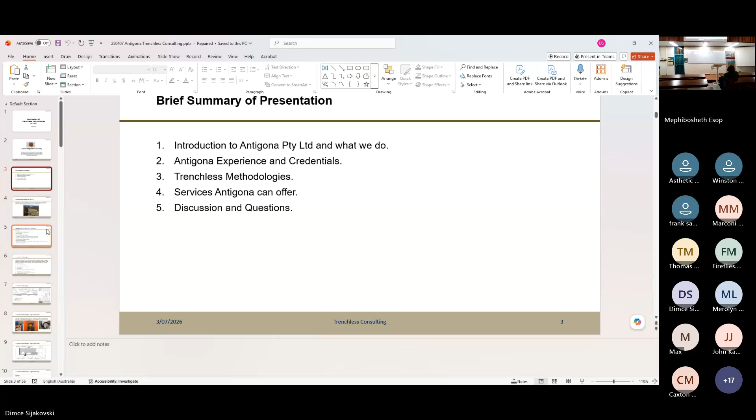So this little company was established back in 2004 and exclusively has worked assisting contractors, assisting authorities. It provides consulting, design during pipeline installation, communication installations, and as I said before, it has got application into a lot of infrastructure areas and the mining areas.

The company specializes in contracts and project management, site supervision. We can do analysis and evaluation of the potential. We can do estimation, cost analysis, methodology recommendation, setting objectives and implementation, and attaining implementation of long-term plans, business development, and as I said, our clients are contractors, consultants, state and federal, road, railway, water authorities and agencies.

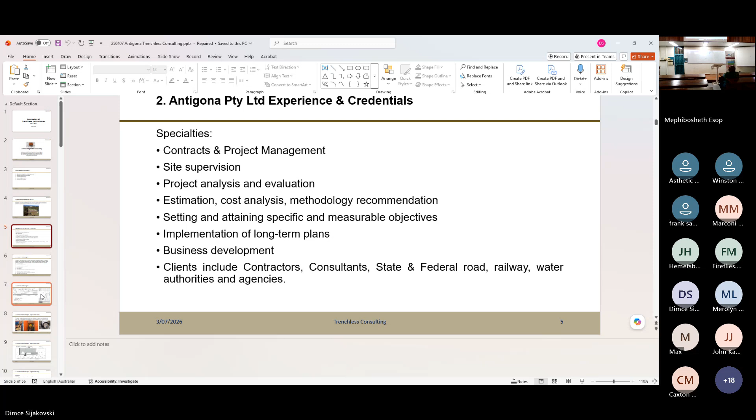Depending on who you talk to, there's no specific standard, but these are the types of methodologies that are most common in Australia and throughout the world. The simplest of all is auger or thrust boring. Then we have microtunneling / pipe jacking. We have horizontal directional drilling.

Pipe rehabilitation is something that I think will be quite applicable for the streets of Port Moresby. Pipe ramming was an early methodology that is not that often applied lately.

I decided to put here an example of launch and retrieval steel segmental shafts, which can be used as the word implies, to launch the microtunneling machine and to retrieve it from the other end, and then it can serve as a shoring system while you're building the manhole. But there's plenty of photos down there. I believe photos replace 1,000 words, so it will be clear once you just go through it.

When I was driving on the Cocky 2-mile road last year, I noticed an example, and Murphy here is telling me that case is potentially being closed now. But I want to explain to you, I use that as an example of what can happen, and unless the service, the stormwater pipe is repaired—and it can be repaired by trenchless methodologies—because that specific case was quite complex for it to be repaired with standard excavation, cut and excavation methodologies.

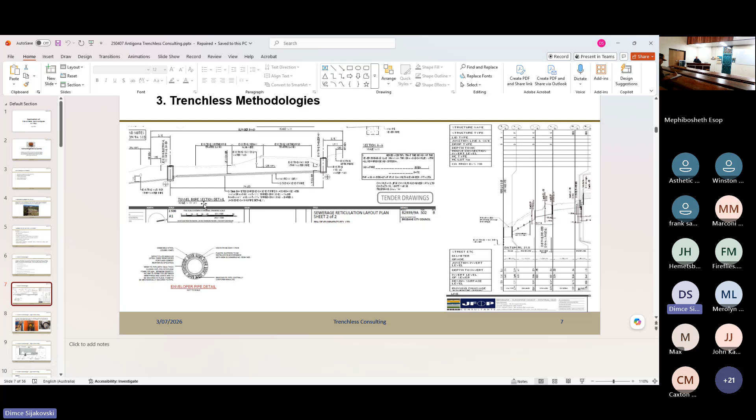And it's not just any geotechnical information that is needed. You need to do the geotechnical bore at least to the invert level of the pipe. You need to understand where the water level is. If there is a water level, you need to determine whether that's water level based on rainfall, or is it water level that's always there. You need to determine the abrasivity of the rock, the strength of the rock. There are standards and specifications which nominate what the geotech report needs to have.

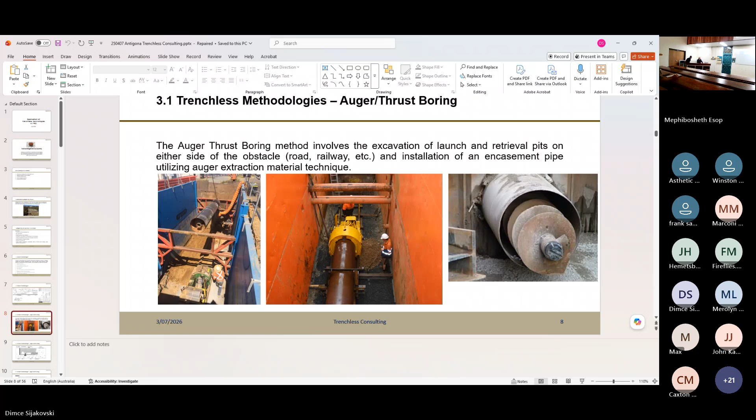This is your typical auger boring machine. So this is your typical auger boring setting up. This is your auger borer. These are the augers that go inside the casing, and the next slide basically explains it.

So you've got a cutting head here at the front, and the earth that's excavated at the drill face gets transferred back through the casing with augers that are tied to each other, and then it basically comes out of the auger machine. It's one of the simplest of methodologies.

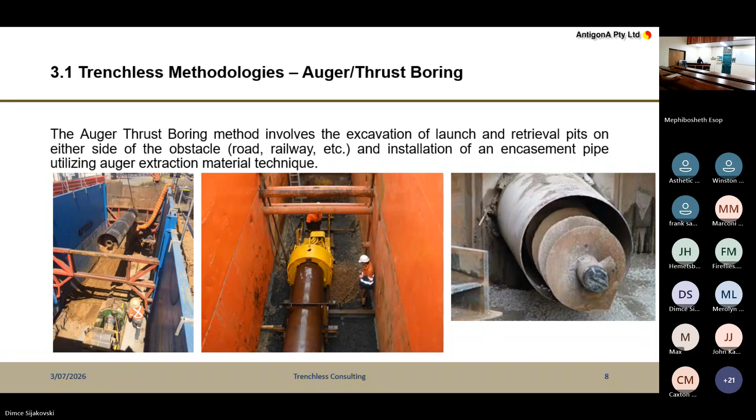You can't steer this method, so you rely on the experience of the operator, and usually it's applicable for water pipelines where the precision can be off by 200, 300 millimeters left or right, and it's only good up to, let's say, 50, 60 meters. Depending on the experience of the contractor, they can go more. But that's your typical auger boring method.

Each of these methodologies has got its own advantages and disadvantages. Like I said, auger boring is cheaper because the methodology used to extract material from the head of the bore is basically augers, and then it comes into the pit, you pick it up with an excavator, off it goes. The next methodology is, let's say, vacuum, and you need to have a vacuum truck on site all the time, but that will come in the next slide.

The disadvantage is that it's not as accurate. It can't go in very, very hard soil. It can only go to 20 MPa UCS, and as I said, the bore length is limited to about 60 meters. Whenever something goes beyond 60 meters, we try to price it as a guided bore, which will give you certainty where the bore will exit, come out.

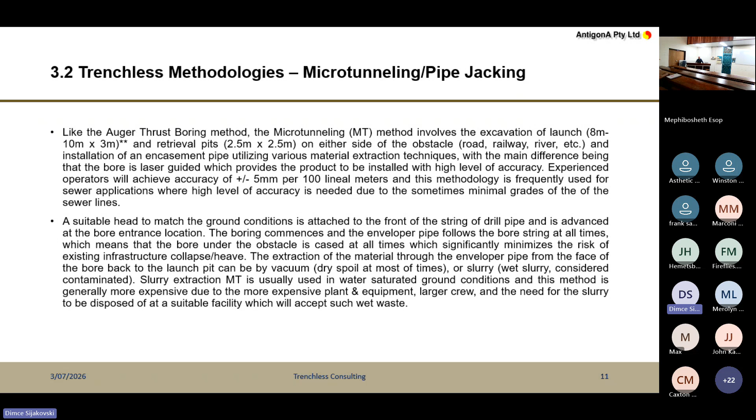This is very much utilized in Australia, in particular for deep sewers, where the difference between the starting and the end invert level is quite limited. So if you've got, I don't know, 100 mil over 1 kilometer for a 1 kilometer sewer to be installed, it's very crucial that you achieve that precision. This methodology can go up to 150, 200 meters using the humble pipeline laser.

There are more complex machines, which I'll show a little later, that can go a kilometer, 2, 3. On a mining project in Papua New Guinea, there was 4.2 kilometers of microtunnel done. But that is a complex machine that uses complex survey methodologies, and there's simply no time in this short session to explain it in detail.

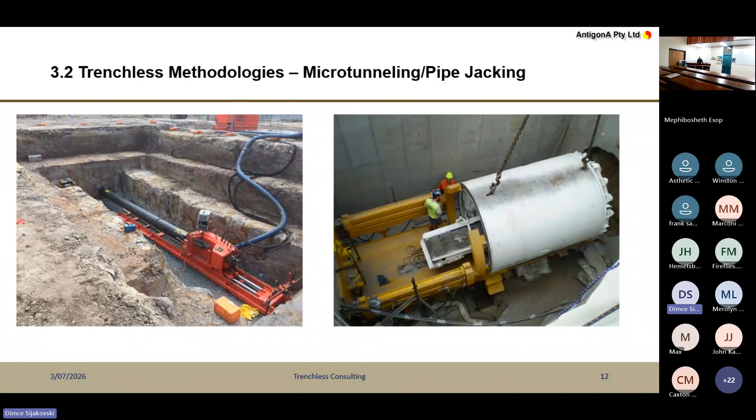So it's very specific. Every job is specific. You need somebody that knows about the technology to consult and advise for the best choice.

This is a project that was done for a company called Tunnel Boring Australia. They specialize in pipe jacking. I'm not sure if you can see this at the back - this is a thrust wall, part of the design of the works. In front, the white part is the shield, and behind it we have specific concrete jacking pipes coming through.

In this shield, as we call it, there's an operator sitting. If the ground is favorable, which is OTR or other than rock, he just digs it with a simple backhoe digger. The advantage of this methodology is he can see if there are any obstacles.

I don't want to tell you what we've come across. We've come across cars, reinforced concrete, manholes, everything, even some bodies, but that's okay - I'm joking.

This methodology we call open face pipe jacking. The operator can see what's going on. If there is a big boulder, for example, or something reinforced, we can cut it and pull it through the shield and through the tunnel that we have formed.

This is the more complex machine. It's a German machine, and Herrenknecht is one of the leading manufacturers, but they are very expensive. The trouble with them is they don't have an open face. So if you put this cutting head for mixed ground conditions and you come across hard rock, the only thing to do is dig it from the top, and that's the risk usually taken by the contractor.

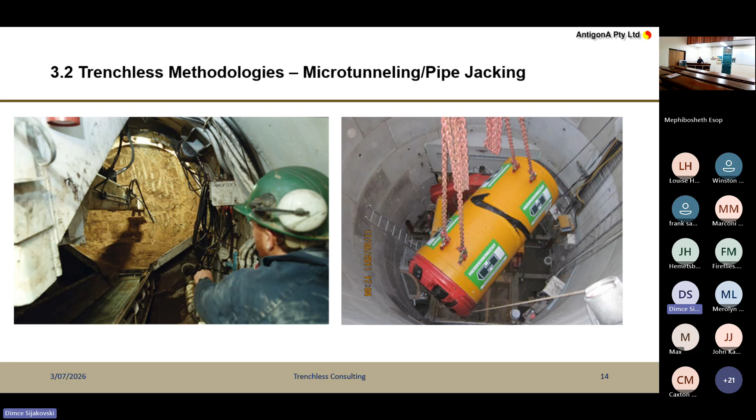But those machines are steerable. To do a 4.2 kilometer tunnel, like I explained before, you need a complex survey guidance system, but you also need intermediate jacking stations, because there's no way you can push 4.2 kilometers of pipe with all that pressure around it using just these jacking frames. So an intermediate jacking station is introduced every 100 to 200 meters, and then you push that part of the tunnel. These are very, very complex, and the mining and oil and gas industries can afford that - here you wouldn't have application for it.

In this city there are possibilities to put sewers and storm water very deep, but a feasibility study needs to be done so you can determine - or again, NCDC or Water PNG can decide whether it's needed.

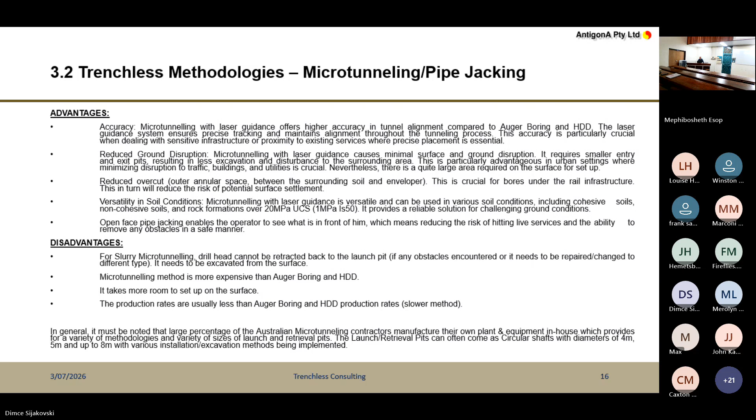If you want to do rock, you have to have a rock cutting head. It is very important for the contractor not to go bust, to understand what type of rock we have. There are certain rocks that are very abrasive. For example, Sydney lies on a thing called Hawkesbury sandstone, and while it's not very strong, 50 to 60 UCS, it is very abrasive. So if you're in the business of microtunneling or pipe jacking and you do not allow for that, you won't be in business for very long. So that's with the pipe jacking.

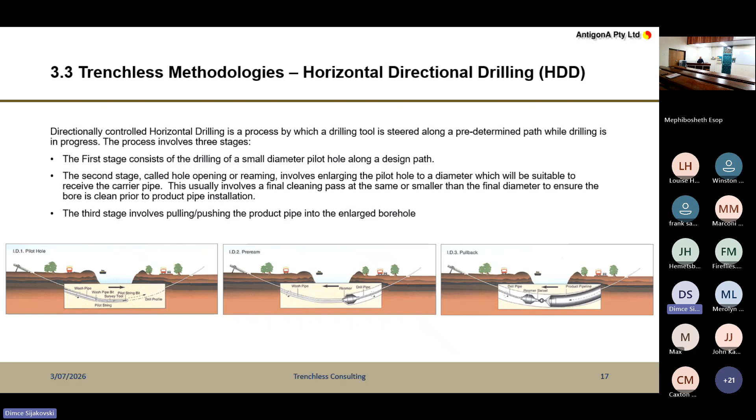The other most implemented trenchless technology is HDD. I'll be very brief on this one, Tony will have another presentation where he'll go into more detail. But basically, if you're trying to install a cable, an HDPE pipe, or a steel pipe for oil and gas or water, and you come across a river or something like that, you do a pilot hole, then attach a reamer to enlarge the hole, condition it, fill it with mud, and then attach the string of pipe you want to install, and pull it back. It requires great skills. These are for bigger diameters, 400, 500, 600, 700, but this methodology can also install 63, 67, 75 mil fiber optic cables in one go. Tony will touch on that in more detail.

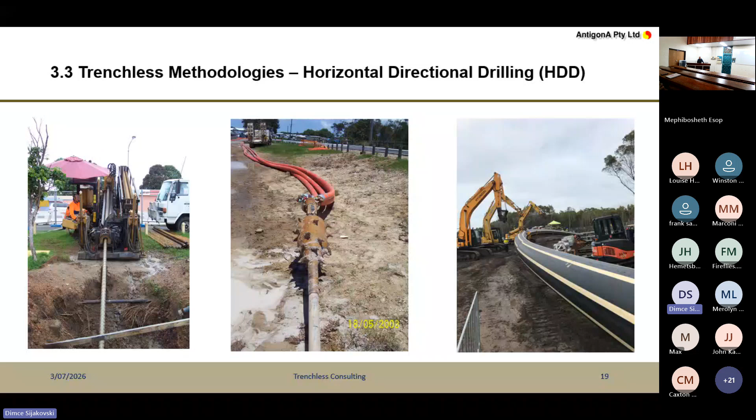This is what is needed, I believe, to begin with for installation of conduits. You can install multiple conduits, or this is your HDPE pipe. It sits on rollers or pipe stands. Again, I'll let Tony do a bit of chat on that. This is a big HDD spread. You see it's made of, part of it, we do a lot of recycling.

Just to give you an idea, it can go under hills, can go 1.2 kilometers, diameters of 1 meter, and it's applicable for gas, oil pipelines, and slurry pipelines. But it's not cheap, the design engineer needs to do his work. If this is a hill that's 300 meters high, how are you going to dig that? It's often much more expensive than doing this. So it's an estimate the design engineer needs to make, and usually the HDD contracts in America are separated from the pipeline contracts.

So the owner, say Total or ExxonMobil, if they've got a pipeline of 50 kilometers and there are certain areas, high mountains or rivers that need to be crossed, you definitely cannot lay the pipe on a river, it'll just get damaged within a year or so. So you need to bury it under the river, and this has been going on around the world since the mid-90s with this methodology. So you can get an idea how it is. This is the entry of the pipe, and the pipe sits on rollers here.

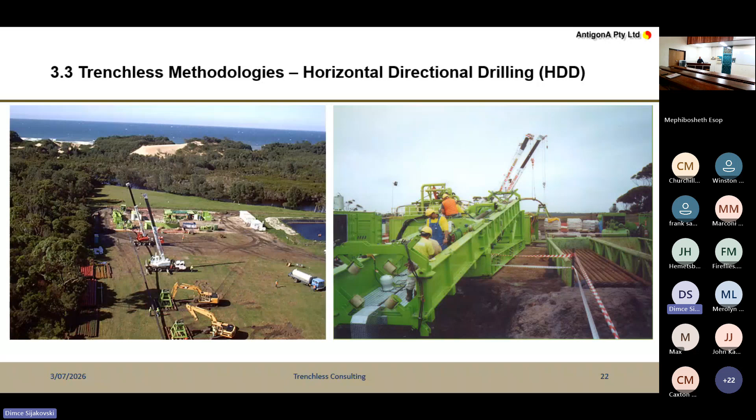This was a company called Cherrington, Australia, and I've got a little 5-minute clip. They were the pioneers of this methodology. He designed this rig where you bore, condition the bore, fill it with mud, and then push the pipe sitting on this side into the bore, without needing a pipe laying barge. That's the forward thrusting rig.

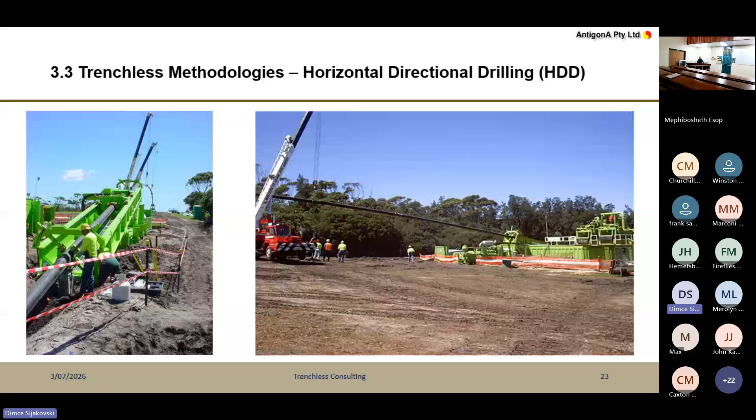You can see there's pipe laying holding here. You have to carefully determine the angle under which the pipe goes into the rig - if you miscalculate that, there are a lot of problems. This was the rig, and this is what the client gets at the end: he can join these two pipelines and they go to the plant processing facility.

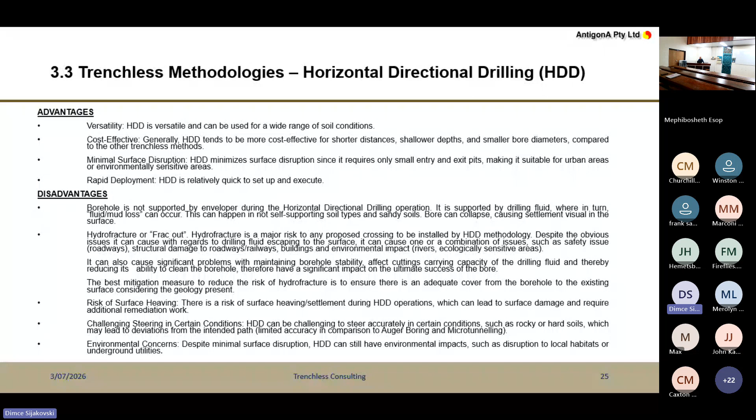Again, there are advantages and disadvantages associated with each method. HDD is generally more cost effective, but there are disadvantages like the borehole not being supported by casing. You need skilled personnel to know the angle, speed, and size of the bore. For example, drilling through rock doesn't need as big a bore to accept the carrier pipe, but drilling through clay or other material needs a bigger diameter bore.

Another trenchless methodology is pipe rehabilitation. I'm going to try to share a clip - basically it's a trenchless technique that rehabilitates the damaged pipe using a flexible lining material. You insert the material into the manhole and it takes the shape of the pipe.

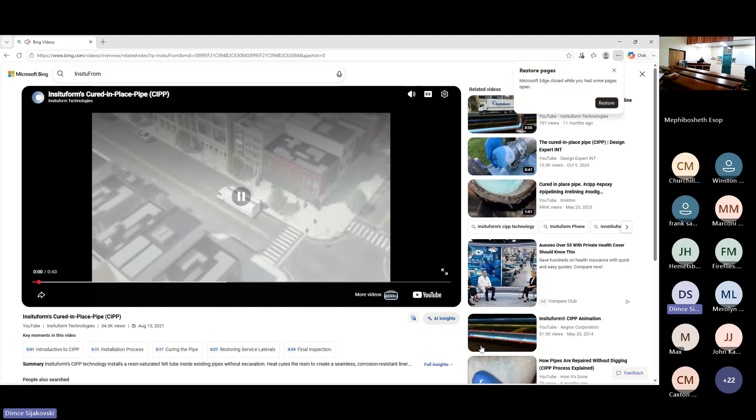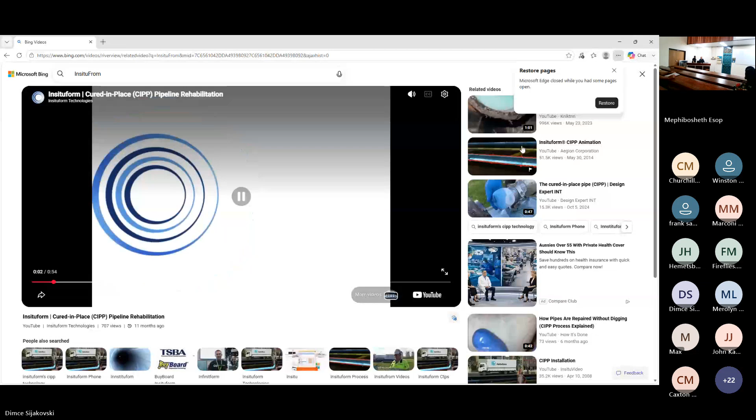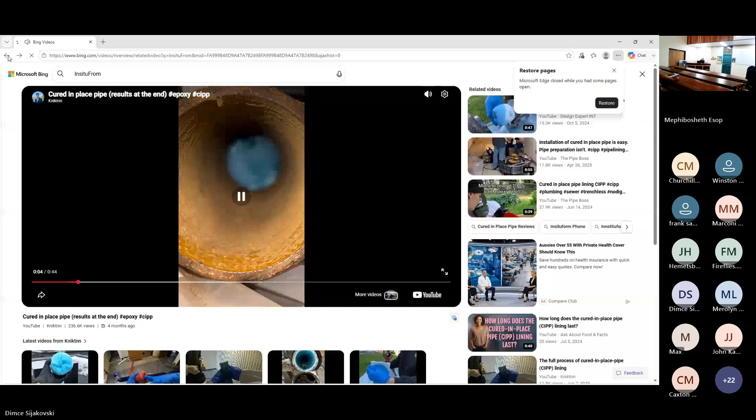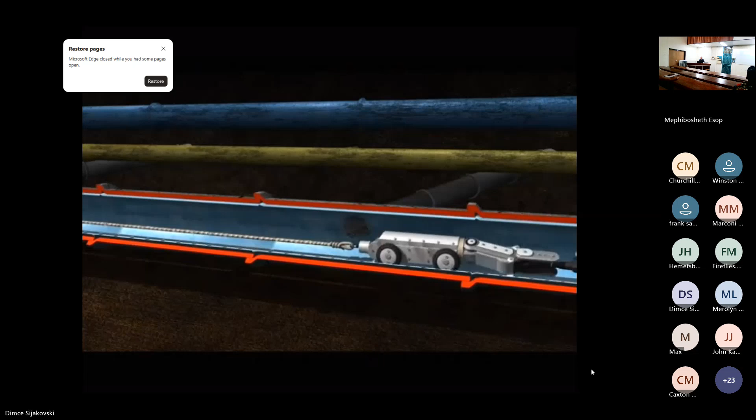It was just a short clip of restoration of pipeline using that lining. I'll play it one final time to get an idea: basically you insert this resin inside a manhole, and then it takes the shape of the damaged pipeline.

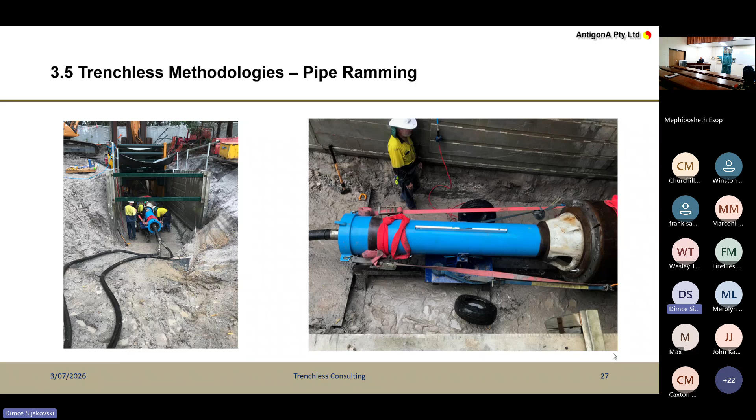Back to normal, yeah. One of the other methodologies is pipe ramming, but like I said it's very basic - it's a pneumatic hammer just going through a receiving pit. It's not that common anymore, and it's less favorable because you can't achieve precision, but it's suitable for short distances and non-critical infrastructure.

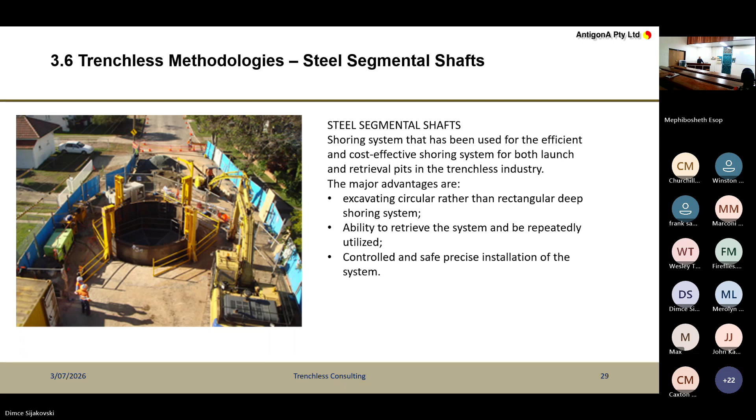I wanted to get your attention on steel segmental shafts. This is not a trenchless methodology as such, but a method developed some 15 years ago based on an idea we had at Tunnel Boring Australia. It's a shoring system used for launch and retrieval pits - a steel segmental shaft. I'll go through some photos so you all understand it. It's very effective and very engineering-applicable in areas with ground conditions other than rock.

Basically you have a 4, 5, or 6 meter diameter cutting edge put in a hole, about 1.2 meters deep, and you leave this trench for the thrust ring we need to do later. The thrust ring steel and cement strength is designed depending on ground conditions, depth, and bore diameter. Once placed on these stands, we put 4 gallows or jacking rams which push these 1.2 meter segments - each circle is made of 4 or 6 segments.

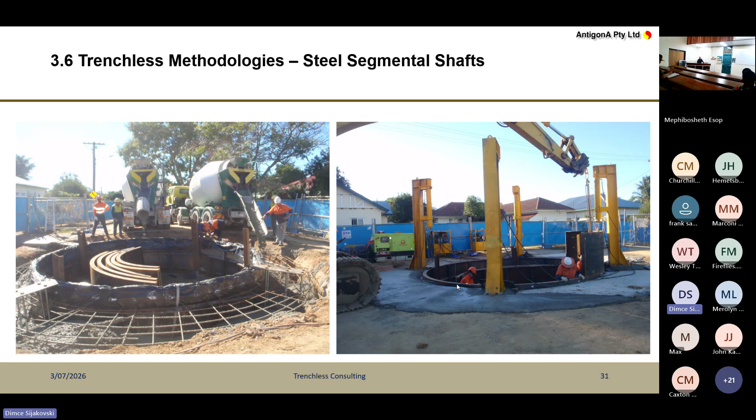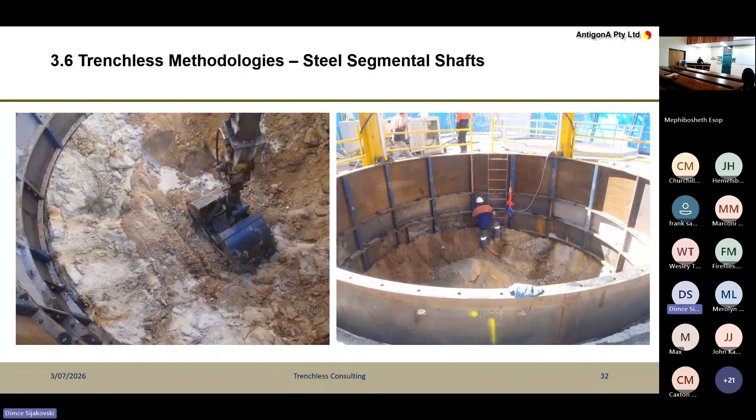They're different designs. The excavation is done by a telescopic excavator, and you excavate something in the middle and then push. It's a very effective excavation methodology, used not just for launch and retrieval pits, but also as a shoring system, because with this you can go 20, 30, 40 meters. It's very difficult to do a 20, 30 meter rectangular excavation, and it was perfectly designed.

It's a controlled sinking of the shaft. There's a platform where the laborer sits, stands, and you advance.

In this case, we came on top of a 100-year-old brick sewer tunnel. This is in Brisbane, as part of the Airport Link project, somewhere around 2015. Our job was to push another sewer pipe from this side into this existing tunnel. So we dug on top of it, and then we bored from another location into here. Complex, but very satisfying. It was the only solution because we had to put this pipe under 4 or 5 houses — otherwise you wouldn't have been able to do it. That was the only type of design available at that stage.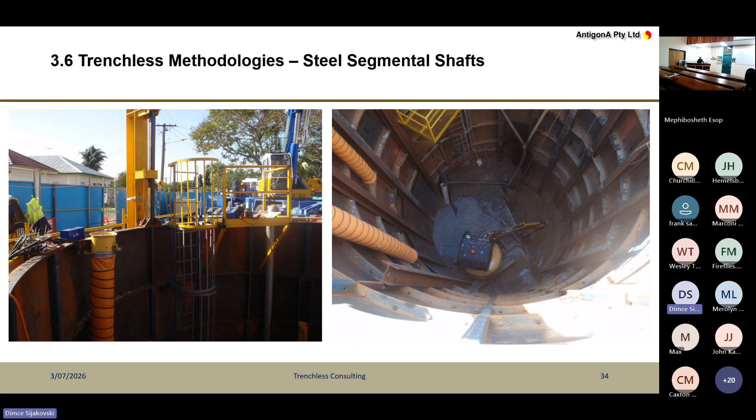The good thing about these steel segmental shafts is once you've done your microtunneling or pipe jacking, you can build a manhole. And the steel segmental shaft around it, once you've finished building the manhole, you can pull out — it's like pulling a knife out of butter. So it's a very effective shoring system, if you like it. This was a project at Woolloongabba on behalf of...

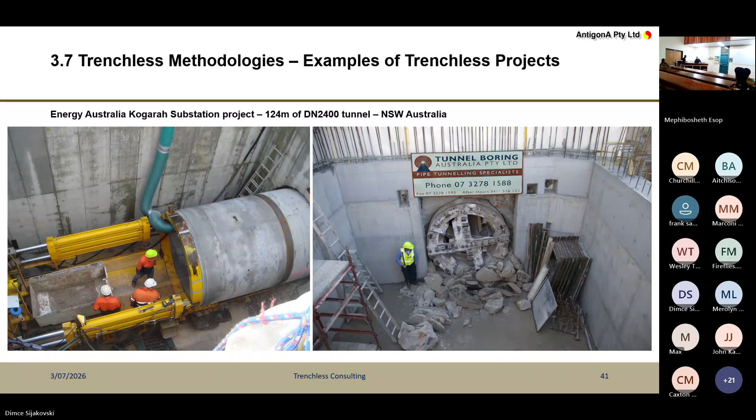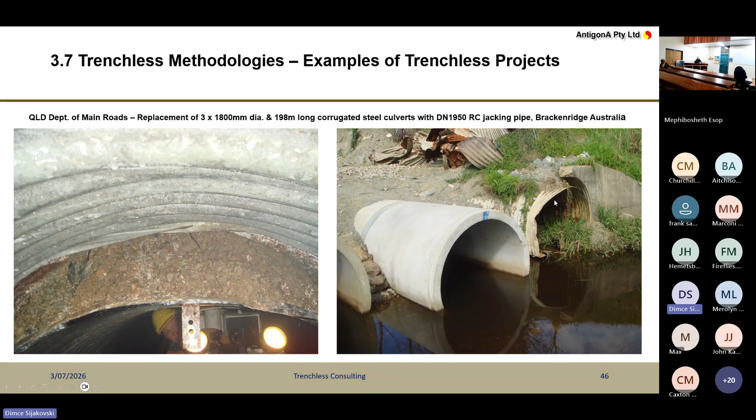Once you have installed this, from inside, we grout the pipes. But this is the damage that can be caused in these corrugated steel pipes — you see, that's the condition of that one. That's the condition of the new one that we had once we replaced it, and this is a new one. So when this happens, you see, that's the corrosion that you have.

Once this starts happening, the road above starts to collapse, and you have to bring in the Department of Main Roads or whoever looks after the road every 6 months to fill the top. They decided they're going to have a massive action, so we've replaced thousands of these only in the area of Southeast Queensland and a little bit higher up to Hervey Bay. When I say we, these are companies like Tunnel Boring Australia, Pezzimenti Australia. The funny part is that this corrugated steel pipe was sold to the authorities by a company called Humes, and now they're selling them the concrete pipes, which is good business.

This is what it looks like inside. This is a good friend of mine who knows how to operate these machines. Basically, we call this a can opener. You go inside from one side of the steel corrugated pipe, cut a segment of 200 or 300 millimeters, pull out the corrugated steel pipe, and then push the concrete pipe against it. So it's all the time protected.

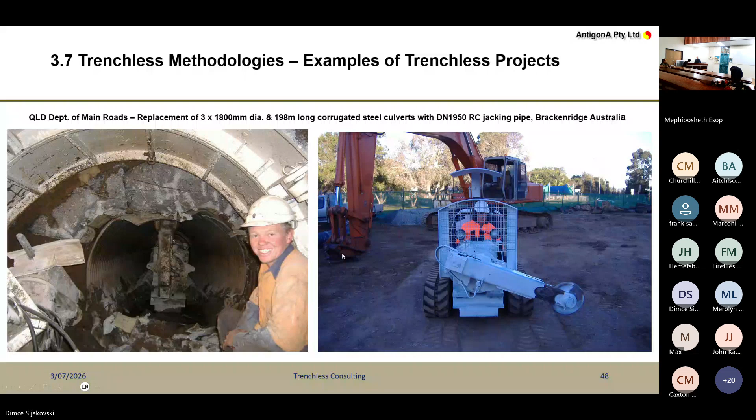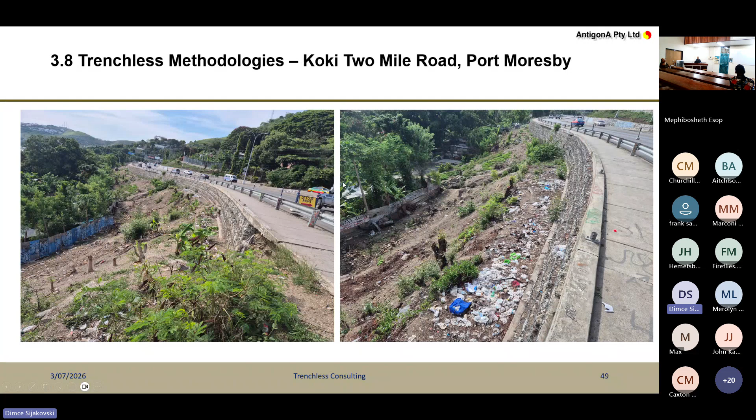This was the culvert, and it went under the middle of the road, and this is where the water gets in and comes out. But because of the damaged culvert, you had this void forming here. And with every rain, this void gets bigger. This part of the road was blocked. These are photos that were supplied to me by Lazaro Hemetsberger.

So your culvert there is getting damaged with every rain. This void under the road gets bigger and bigger. And one of these days, if it hasn't been fixed—but I'm sure it has been—a big truck or a car will just drop in there.

In Australia, on the Central Coast, there was a situation where a family of four was killed because of something like this. This was 20 years ago. Since then, all culverts are subject to rigorous inspection and condition checking. This was a dangerous thing, and this is what prompted me, Lazaro, and Solomon here to talk about it.

This is one way it can be resolved. You can just realign this pipe, or install a pipe to the center of the pit. Otherwise, I don't know how you fix this other than filling it with concrete. But then what do you do with the rain? I'm not sure.

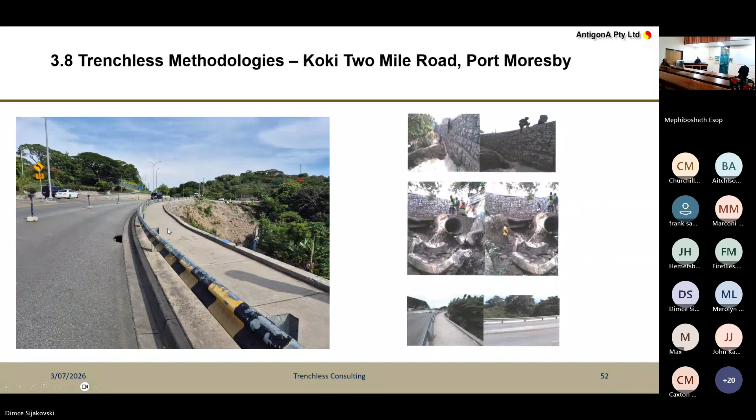July next year is going to come very quickly. Come see — there are a lot of consultants, a lot of contractors, a lot of suppliers, people from all four corners of the world. You can see vac trucks, drilling machines, Chinese machines, German machines, and you can talk to a lot of experts. A lot of councils, water authorities, and railway authorities all attend there.

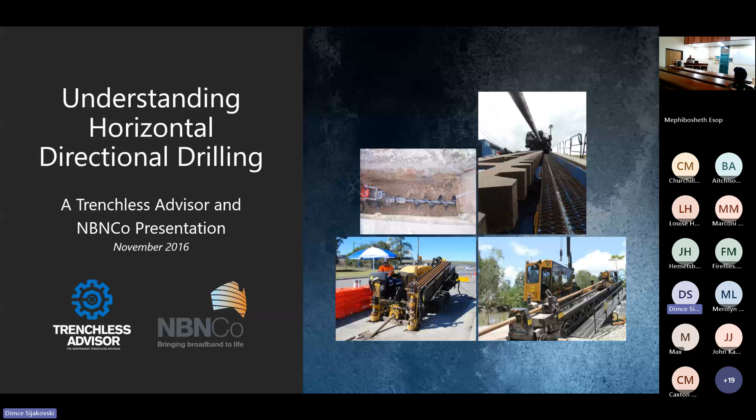A lot of that work has been done using machines, not so much this maxi rig because that's quite large, but definitely these smaller Vermeer, Ditch Witch - what they call a 20,000 pound, 30,000 or 40,000 pound machine. These can fit on footpaths in people's front yards and drill all the way down the street, then come to the surface and drop pits in over the conduit between each house boundary.

Traditionally, trenching was one of the only methods before directional drilling was introduced - open trenches, excavators, trenching machines, vibe plows, which basically put an optic fibre cable or copper cable directly into the ground. That's been around for a long time.

Open trenching works really well where you don't have concrete driveways to worry about, where there's minimal existing buried services - gas, power, existing communication cables - and where the ground conditions are quite stable, not running sand or water-charged ground conditions, and even rock. With excavators and hammers you can hammer out a trench through rock, it just takes a bit longer, that's all.

So trenching works really well in your greenfield areas, which are brand new areas. Benefits are you can visually witness and check the construction, incorporate the most preferred backfill material. Sometimes what you take out of the ground isn't suitable to go back in, and that's why you end up with subsidence. There's also ease of connections, easier to work on, and you can install most pipes - steel, plastic, PE - during open trenching.

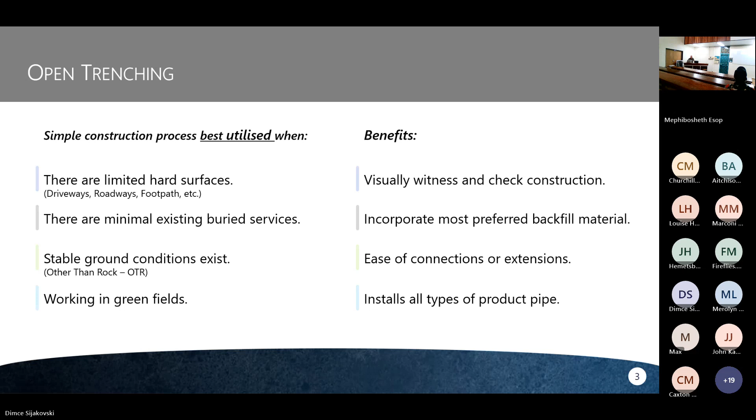But some issues with open trenching are crossing hard surfaces - your roads, bitumen, freeways, rivers, creeks. There might be a retaining wall that separates where you want to get your conduit between two points. Existing buried services can be an issue too - if there are a lot of existing services, open trenching becomes quite dangerous and you can damage those services. Like I said before, sandy, wet or rocky ground conditions are also a problem.

Reinstatement requirements were a big issue too. I was involved in the NBN construction, working for a tier one contractor named Downer in Australia, and one of our biggest problems with trenching and ground reinstatement was reinstatement itself. We were basically coming back 4, 5, 6, 7 times to replace people's driveways, continually topping up the trench with topsoil and grass, because residents would complain that after rain the subsidence was there. So our contractors would basically do the job 4 or 5 times.

So NBN became aware of the HDD drilling services and went down the pathway of trying to minimise open cut trenching and utilise HDD instead. We ended up doing a lot more conduits underground using directional drilling machines.

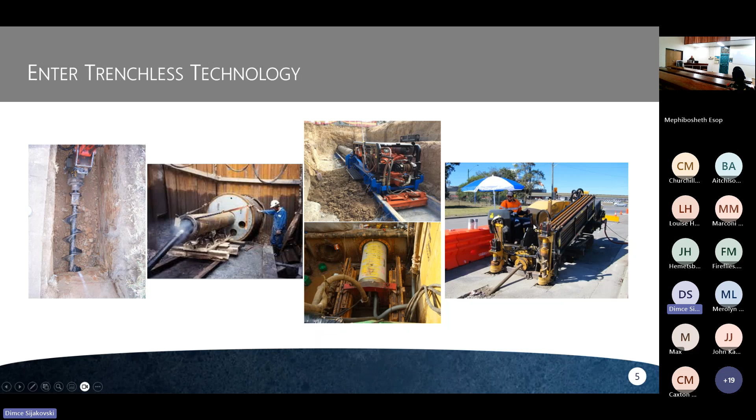So they're surface launched, basically sit on the surface, as opposed to your pit launched machines, which is your microtunneling, auger boring, ramming, pneumatic piercing, and horizontal directional drilling. Like I said, it'll sit on the surface.

I have been involved in projects where we've had to dig the machine into below ground, just because of the profile of what we were achieving for the client. So we've done that before. We've excavated, benched and battered down up to 10 metres and put the machine down. It's still done a directional bore, but it has been on the surface. There's been contractors that have actually modified their directional drills so that the rail, the actual drilling component, is down there, and all the power pack and engines are up on top. But that's a fairly extensive process to do.

The benefits of trenchless is minimal disturbance to all surfaces. Long open trenches, generally we're steering away from that. Like I said, coming back and reinstating multiple times just costs everybody too much money.

The HDD is suitable for construction in most ground conditions, and there's minimal reinstatement requirements. So basically have an entry point and an exit point, and that's all you need to restore. Everything in between that hasn't been disturbed stays as it was.

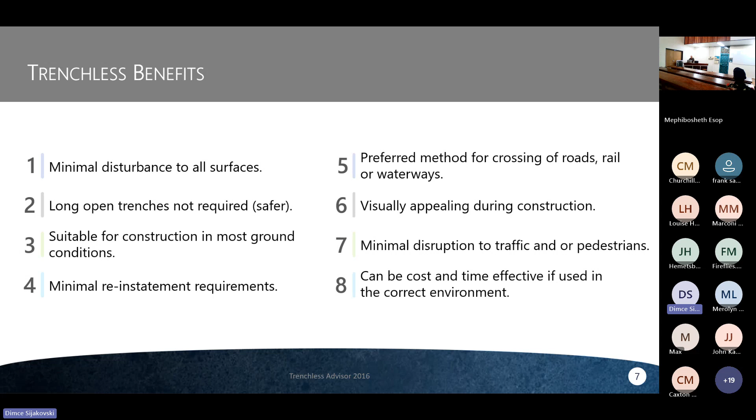Visually appealing during construction, minimal disruption to traffic and pedestrians, and can be very cost and time effective if used in the correct environment.

Here's a little bit about, like I said, surface launch machine. The drills basically do a radial curve and a horizontal, and they are horizontal to the ground surface.

The drill head, which I have some slides of, it is steerable. It's based on a wedge-shaped drill bit, and when it sits in a particular position, if you rotate it, it will spin in. But if you have it at what we call 12 o'clock, it will force its way through the ground and come to the surface. So when we start a drill shot, we have it at 6 o'clock, and it forces itself down into the ground. To explain it to some people, a typical door wedge that you put under the door to stop it slamming shut when it's windy, that's what they sort of shape like.

It has a bevel. They have a transmitter inside the drill head, and then there's a receiver locator box which you can basically walk over the drill head, the sonde housing, and you know exactly how deep it is, what direction it's going in, and what pitch you're at all the time. It's a live feedback from the transmitter to the receiver.

Another part of the process is the drilling additives, which is your muds. Very similar to the oil and gas with getting the cuttings out of the hole. It's the same principle, bringing it back out the hole to keep the hole clean.

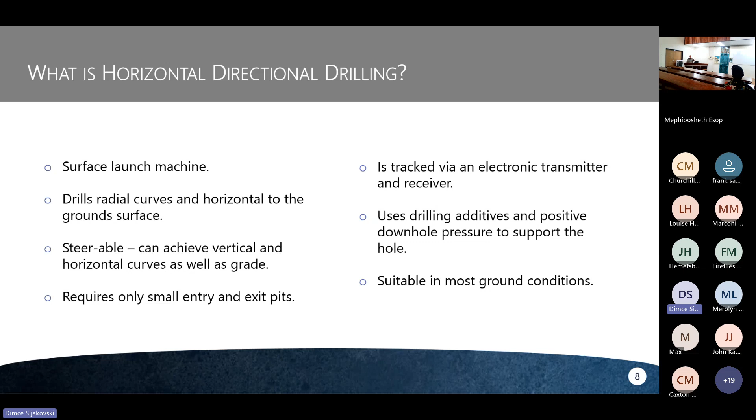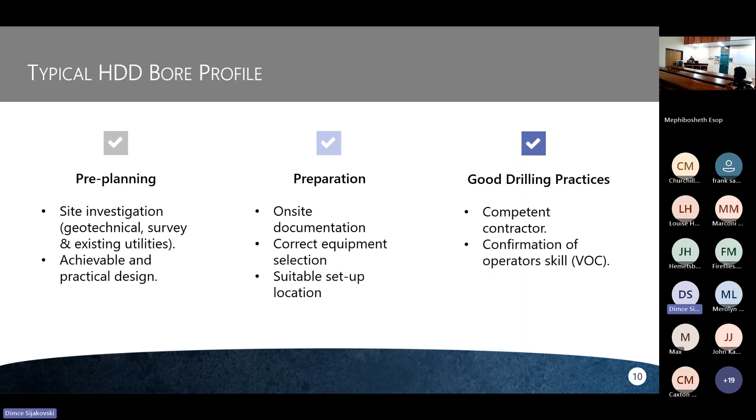Every bore I've ever been involved in has always been considered site-specific. Every design must be practical and achievable. That's the whole purpose of the pre-planning - to go out and determine, well, yes, I could do this, or you know what, it's not suitable for HDD, it might be suitable for microtunneling - set it up with 2 shafts and do it that way.

Yeah, there's always a way. It's just finding the most cost-effective and safest way of doing something - not necessarily the most profitable.

All designs must include a safety in design approach, understanding all the risks and issues. Never assume one bore is the same as another. Correct pre-site investigation and planning is very important, along with engaging a contractor who has the correct skill set to succeed in the job.

We do a lot of project monitoring and management. Over the last few years, both Tim Shane and I have been called in to some tier 1 projects to be superintendents, just to ensure that the contractors are doing the right things, remaining compliant with their paperwork and their methodology, and that's been quite good for us to see how most of these guys are operating out in the field.

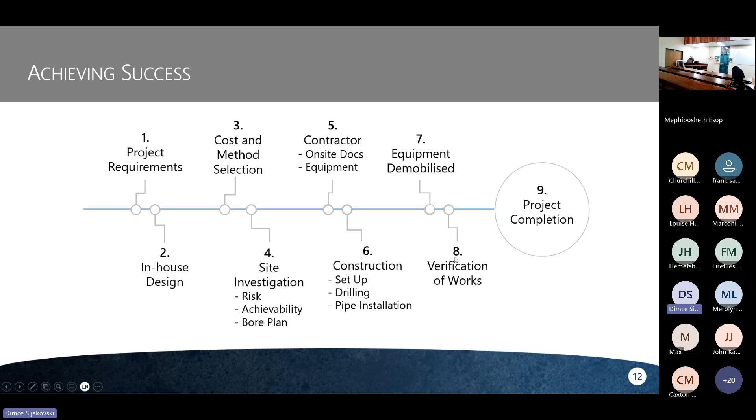Ensure that your contractor has got all their on-site documents and equipment. Construction setup, drilling, pipe installation, and then your demo and verification that the job's been done to a particular standard or to the client's satisfaction. And then, project completion.

This is a 20,000 pound machine. This machine was most commonly used on the NBN rollout in Australia, all over Australia.

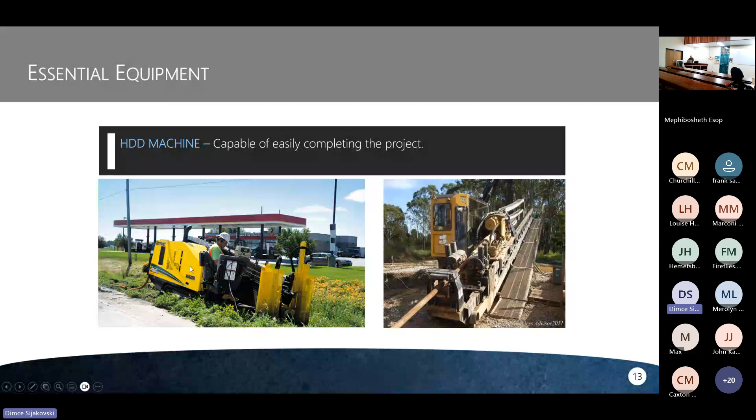And the one beside it is a maxi rig. That's a Vermeer 330 directional drill, which is capable of drilling 2 to 3 kilometres in length at depths of 50 to 60 metres, and then pulling back a pipe that's a metre in diameter. A lot of contractors in Australia that have been in the game for 20 to 30 years are running these rigs now. They've gone from that 20 years ago, and they're now running maxi rigs.

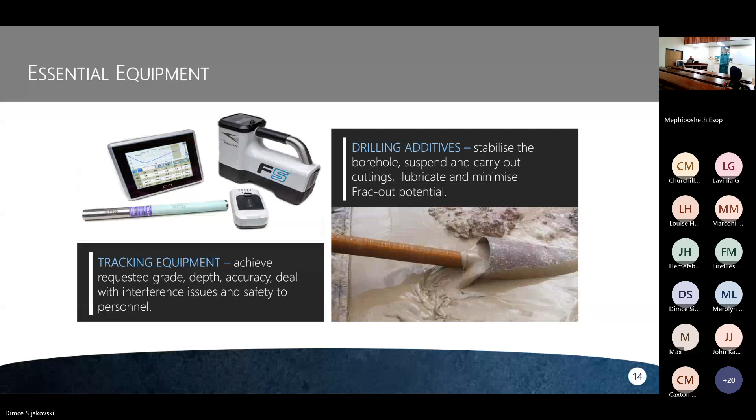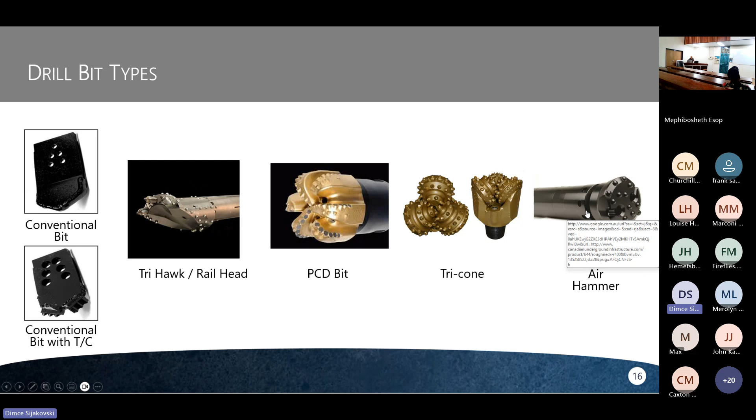There's also air hammers that are set up. They'll drill rock, they'll drill extremely hard rock. I haven't had a lot to do with air hammering, but I've got some colleagues that have done it. It's another successful way of getting through difficult ground conditions.

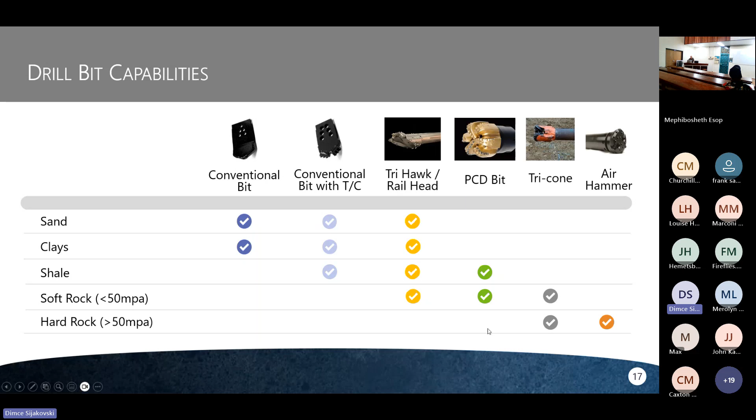So the risks and limitations.

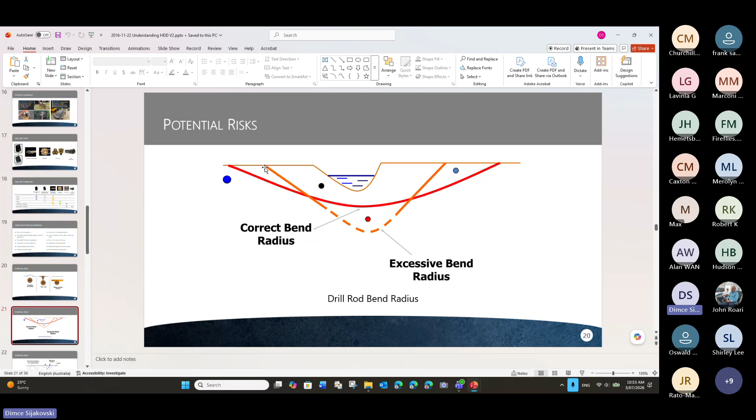This is a potential risk with your design - excessive bend radius, to keep it short, as opposed to making it a little bit longer with the correct bend radius and still avoiding all the services. Depending on the pipe diameter, usually at this point in the bore is where pullback pressures start to rise. So the gentler the arc, the better off you are, especially below a river. That can increase the frac out chances of putting fluid back into that creek, just because it's not an ideal bend radius.

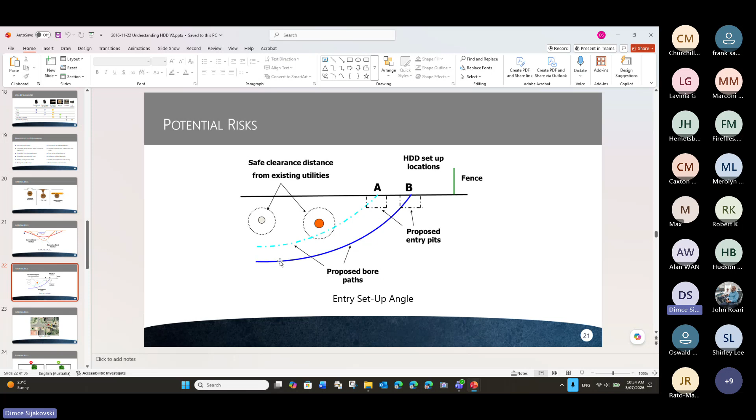Once again, set up locations - this is the whole point of doing all the pre-planning. If your setup is too close to an existing service, you can see it gets very close to that particular service, which being orange, it's probably electrical. I always try and give myself plenty of room, so set back a bit further. That way you've got more time to have a safer clearance with your setup angle.

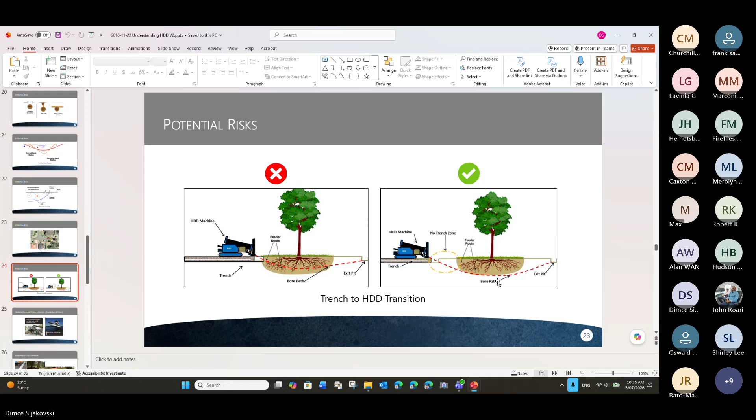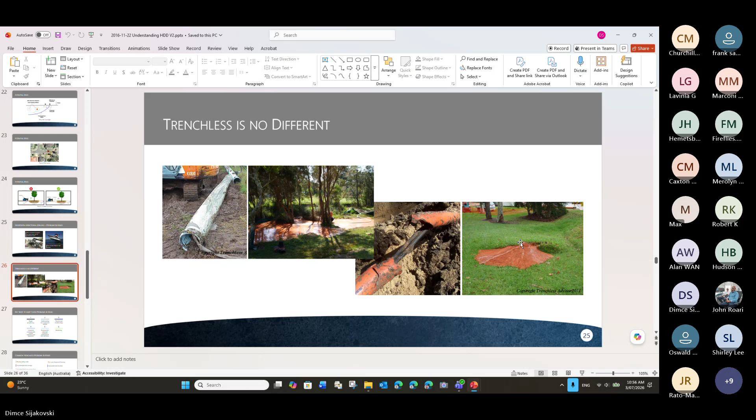So with proper planning, understanding the construction methods, practical and feasible design, competent contractors with experienced capabilities and machinery, ensuring both your client and your contractor understand all the risks and issues, and some monitoring, it can be a very successful way to install infrastructure. I'm talking water, gas, communications, sewage - not so much stormwater, it's more concrete. Stormwater is more aligned to microtunneling, depending on the diameter. But in saying that, if it's a HDPE pipe, there's no reason stormwater can't be utilised as well.

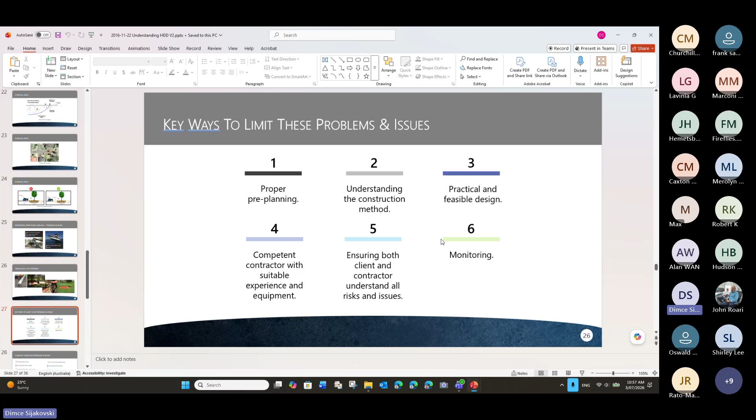Some other issues and problems - existing utility strikes, unachievable bore designs. Sometimes there's just situations where you can't achieve a safe bore design and bore construction. Failed or collapsed boreholes, unacceptable product pipe - sometimes the guys will receive conduit that has an issue with it, so they're generally advised not to use it. You've got your frac outs, your ground heaving.

Incorrect bore location - sometimes that can be put down to the fact that your beacon, if you allow it to get hot - I think it's 72 or 82 degrees - if your drilling fluid is finding another pathway, sometimes that pathway can go 200 or 300 metres, but you've basically got a dry hole when you're rotating, so that drill head will get really, really hot. Your monitor system will tell you it's heating up. If you get it to a certain degree, it basically cooks that sonde. A lot of guys don't realise, and they'll use it again, thinking they're drilling here, and they actually find out they're drilling over there because their sonde's not working efficiently. So you've got to keep an eye on the temperature.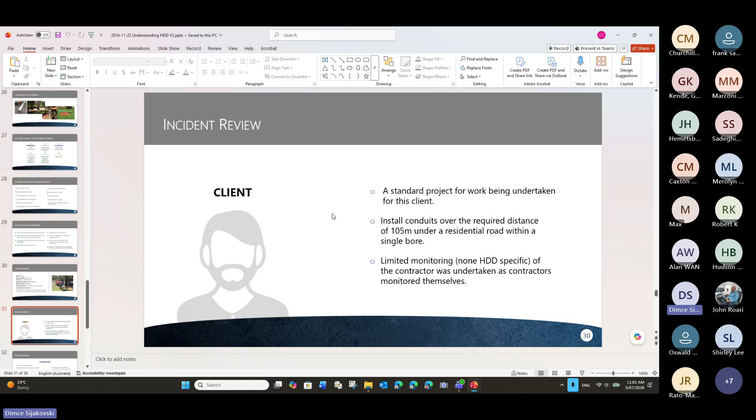Standard project for work being undertaken for the client: install conduits over the required distance of 105 metres under a residential road with a single bore. Limited monitoring - there was basically none for HDD specific of the contractor undertaking the work at the time, so it would have been quite costly.

Equipment used on the site was suitable. All Dial Before You Dig plans, which are quite good now, quite detailed. I don't know if you guys have a similar platform here in Moresby, but basically if you're a trenching contractor or a drilling contractor, you can get plans of where all your communication, water, and sewer lines are. We have access to all that. It's quite good now that there's an app on your phone where you can physically look at the plans.

So yeah, unfortunately these guys didn't pothole on the road to find those power conduits. They've only assumed the depth of the cable because they observed it in the pit on either side. Generally, if there's power conduits in pits beside the road that might be 800 deep, there's a good chance they're going to be 1.2 or 1.5 underneath the road.

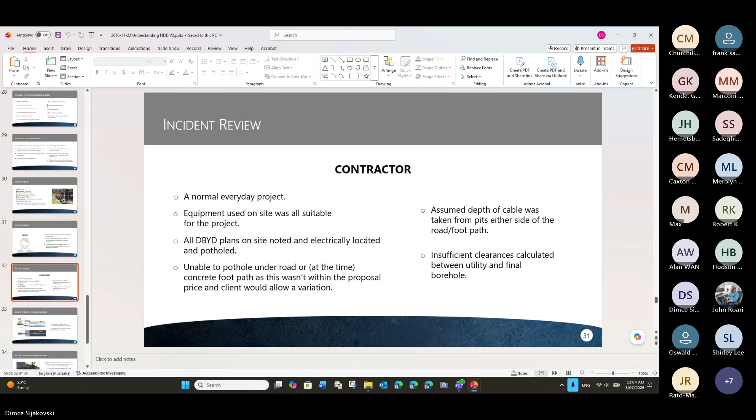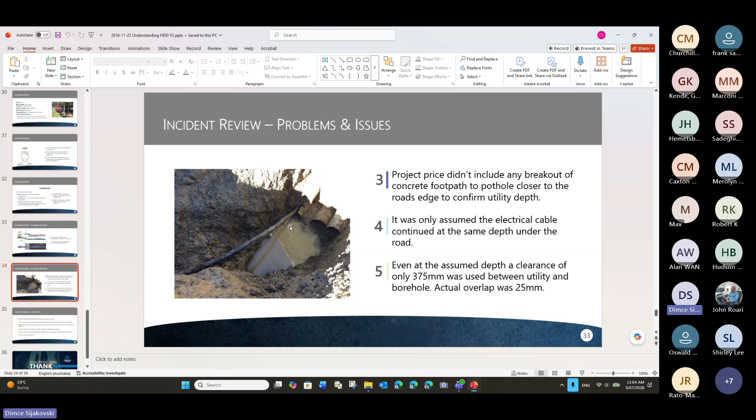And that's basically it. Any questions from you guys?